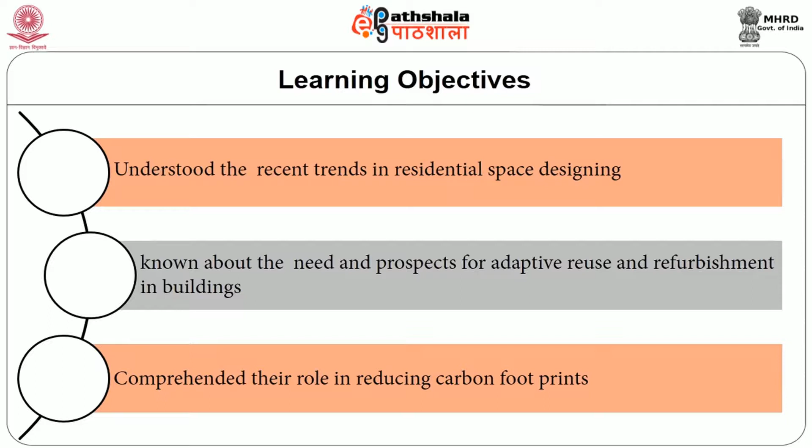Space is a unique element, and its planning, especially for residential purposes, is quite challenging in this dynamic world. Hence, specific objectives have been set such that by the end of the session, you would have understood the recent trends in residential space designing, known about the need and prospects for adaptive reuse and refurbishment in buildings, and comprehend their role in reducing carbon footprints.

First, let us understand why residential space designing is important. A perfect understanding of residential space planning is a felt requirement. The concept demonstrates the maxim 'more with less,' meaning optimum utilization of all available space in the most efficient and effective manner, complying with the user's special needs and requirements.

Space is one of the most valuable assets for human beings, as it reflects one's economic status with the passing of every day. It's a known fact that real estate booms are highly escalating. Hence, it is increasingly important to utilize every inch of space owned in the best and most practical way possible, yet not compromising on modern trends.

Research on improving methods of effective use of this element called space has been ongoing, as it has to comply with both the gratification of the demands of the residents as well as keeping abreast of the recent trends in the field of housing. Residential design enlists designing of the interior spaces of private residences.

This type of design is obviously very specific to individual situations. Therefore, the needs and wants of the individual resident are paramount in this sector of interior design. The interior designer may be entrusted with a job from the initial planning stage or may be on a contract to remodel an existing building.

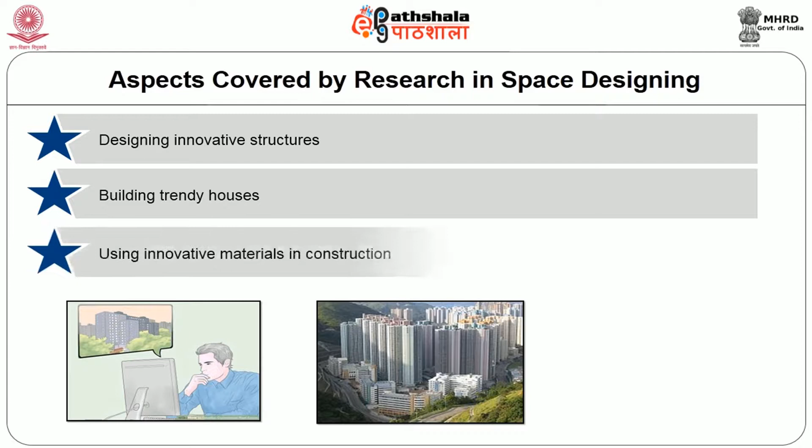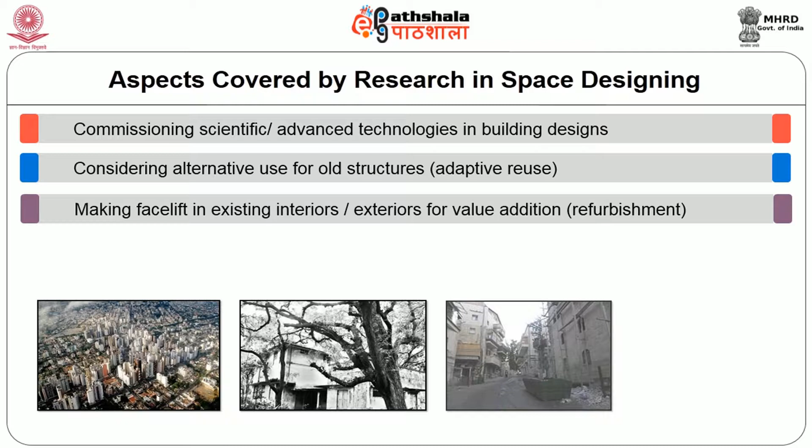Designing innovative structures, building trendy houses, using innovative materials in construction, commissioning scientific advanced technologies in building designs, considering alternate use for old structures - that is adaptive reuse, making facelift in existing interiors or exteriors for value addition - it's called refurbishment, and thinking through sustainable options to retain existing structures.

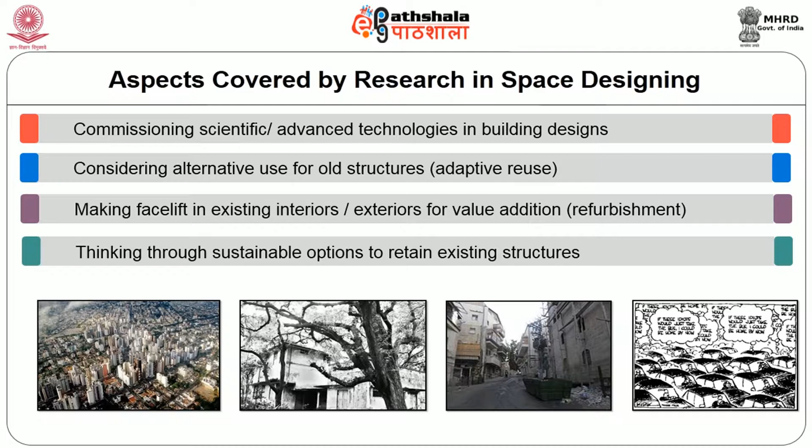All these research aspects warrant new trends and prospects to emerge in this field. What are the emerging trends and prospects seen across?

Trends, especially in residential space designing, happen due to the following major attributes: fluctuating outlook of consumers, the residents; deployment of new wave thoughts by architects, civil engineers, and interior designers; employing new genre prospects and materials in construction and decorating; sensitivity to environmental issues; awareness among consumers and supply side on interior design concepts, plus other influential factors.

They include current status of residents, that is, whether they are urban or rural, their occupation status, their education status, etc. Nature of the residents, whether they are convention bound or modern, nature loving, etc.

Liking for personalized interiors, individual needs and requirements, either for comfort, convenience, or luxury, sophistication versus casual comfort, showcasing of individuality and character in space and interior designing, liking for geometric forms and large outdoor spaces, inclusion of spaces of solitude, tranquility, privacy, etc.

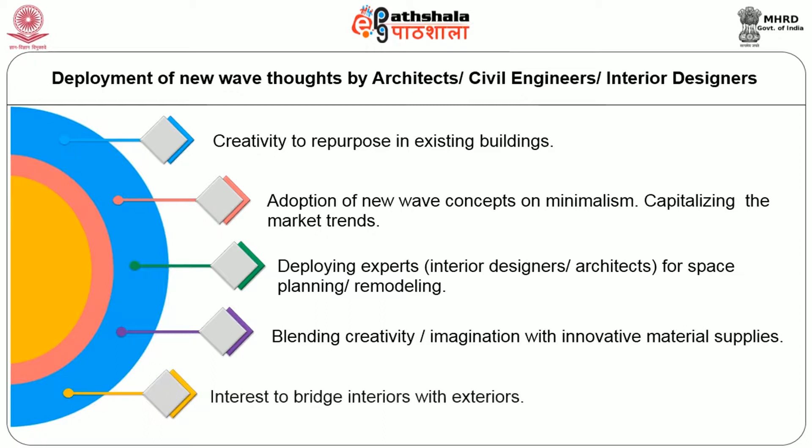They influence changes in the sector by including more than a dozen options like creativity to repurpose existing buildings, adoption of new wave concepts on minimalism, capitalizing the market trends, deploying experts, that is interior designers and architects, for space planning and remodeling, blending creativity and imagination with innovative material supplies, interest to bridge interiors with exteriors, and caution to ensure safety, security, and privacy in interiors.

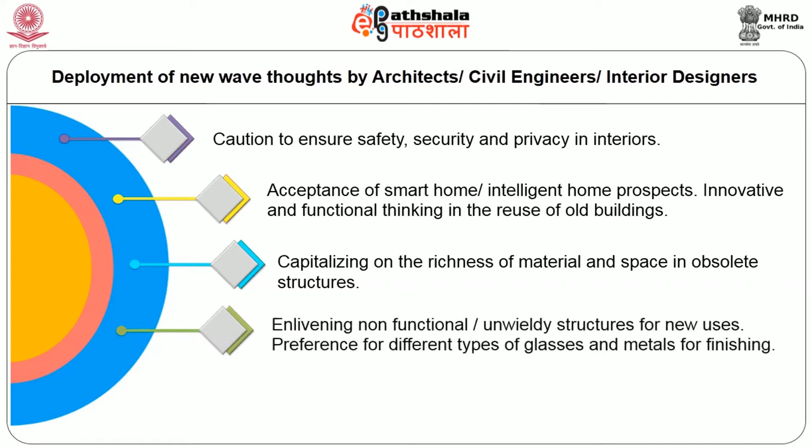Acceptance of smart home or intelligent home prospects, innovative and functional thinking in the reuse of old buildings, capitalizing on the richness of material and space in obsolete structures, enlivening non-functional, unwieldy structures for new uses, preference for different types of glasses and metals for finishing.

Reformed functions of room interiors. So personal experiences coupled with a platter of advanced technology, these groups emerge as new trendsetters in the field.

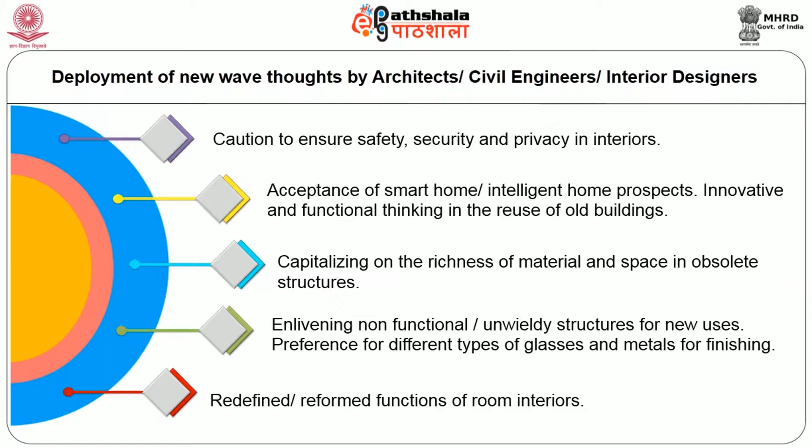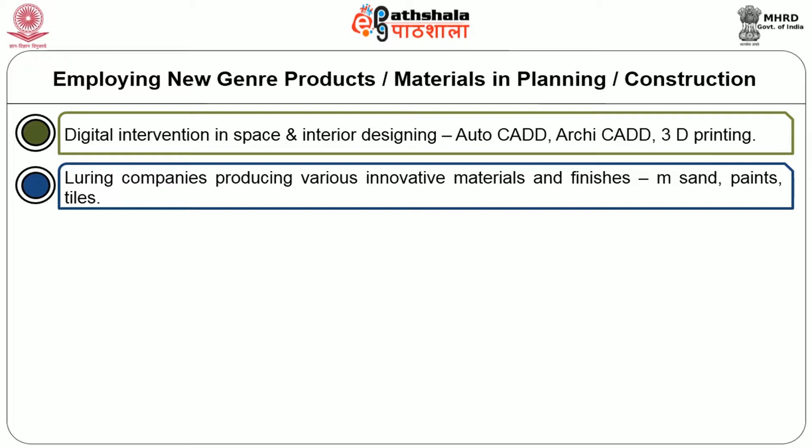Second one is luring companies producing various innovative materials and finishes like M-sand, paints, tiles, etc. Prospects for customization of products and designs, prospects for home, building automation and compactness in buildings, introduction of HMI and human sensitive and kinetic systems in buildings, advances in science and technology in house building sector, optimal use of modular units and prefabricated structures. These are remarkable advancements which have changed the building sector scenario itself.

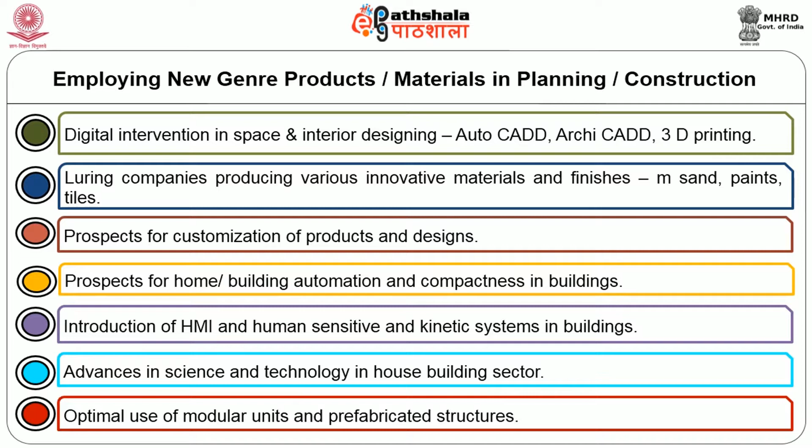I hope you will definitely agree with me. Then we will see the next influential aspect. That is sensitivity to environmental issues. People in general have become quite sensitized to environmental issues in recent years.

This change in outlook has had an impact on the selection and use of building materials too. The points listed in the slide are rather self-explanatory. Sensitivity to environmental degradation, knowledge on the impacts of the construction sector on the environment, readiness to adopt waste reduction,

sensitivity to use of eco-friendly materials and construction techniques, understanding the potentials, durability and benefits of indigenous materials like terracotta, bamboo, etc. Doubtless, these technologies have created vibrant ripples in the construction sector, especially of residential buildings.

Next one is awareness among consumers and supply side on interior design concepts. This is an important fact which has influenced both the demand sectors and suppliers alike and has caused welcome changes in their mindsets. So what changes do you see?

Unwillingness to compromise on quality and detail, awareness on functional and aesthetic designing of interiors, demand for application of good taste in designing, preference for eclectic styles, that is convention blended with modern, influence of media, introducing new recent trends, quest for introducing thematic interiors.

Apart from these facts discussed till now, there are three significant motivators which insist compulsory changes in the attitudes of both the groups. They are governmental and environmental regulations encouraging or curtailing demolition, and color trends of each year. It was bold blues for 2016 and it is dark greens for 2017. Do you know that fact?

All industrial activities have contributed considerably to environmental degradation, some harsh enough to push certain aspects to the point of no return. Population explosion is one such factor.

The construction sector contributes to national GDP to the extent of 8%. In recent years, it has proved to be the fastest-growing sector thanks to rising population and urbanization. The alarming fact is the enormous carbon footprint of the sector.

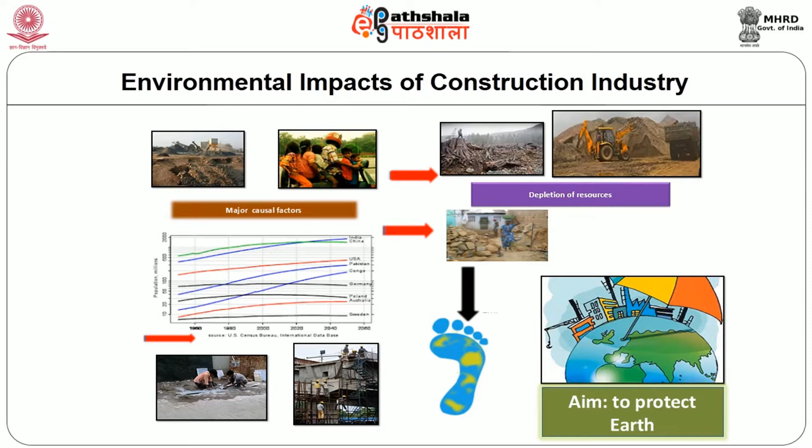Measures on a war footing to stop or at least reduce natural resource depletion, and turning back the clock to nullify effects of reckless actions, need emphasis. If not, the outcome may be catastrophic. Let us pledge and aim our efforts to protect Mother Earth.

How can the construction sector be responsible? Estimates project the presence of 100 million buildings in the country, out of which 90% are designated as residential and the rest for commercial use.

Out of the total energy consumed, more than 20% is used by these buildings. Continued use further not only depletes resources but also accumulates emission of carbon.

Impacts to the environment from this sector should be watched keenly, as India has been declared the fourth largest emitter of carbon in the world.

Greenhouse gas emissions from built environments arise primarily from consumption of fossil fuel based energy. Construction materials used in their turn also generate emissions. This is particularly true of insulation materials, refrigerants, and air coolants that we use daily.

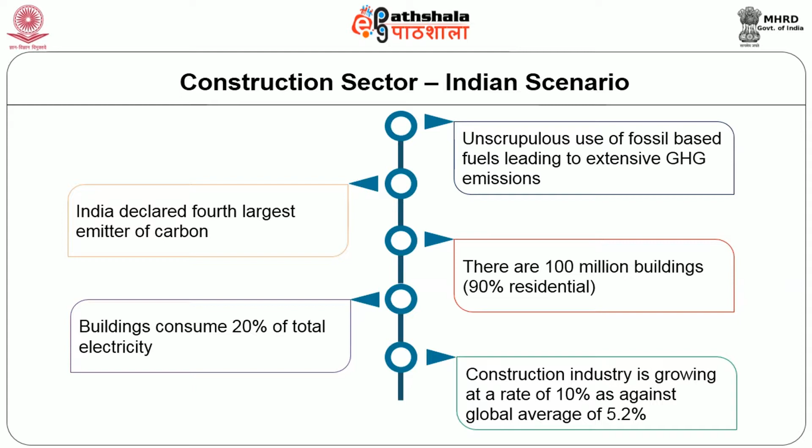Turning an eye to green buildings would be the right choice. Why? Use of various building materials and their impacts could be addressed from the primary stage of processing, manufacturing, logging, storing, through installation and use.

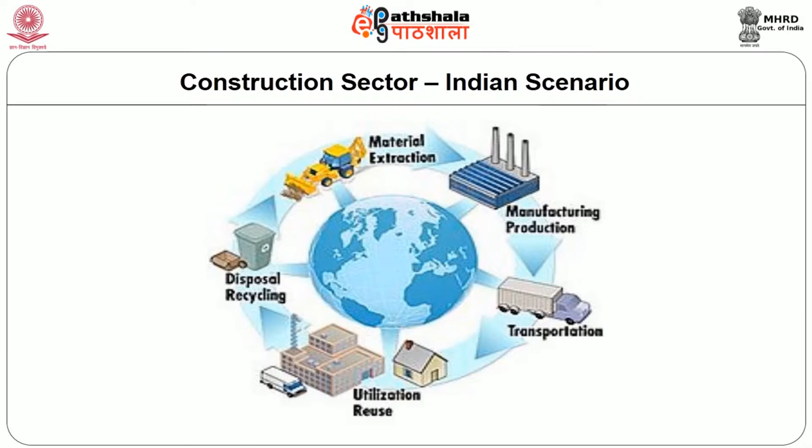During all these processes, large quantities of energy are used, which contribute to overall production of carbon dioxide, which culminates in the greenhouse effect. These stages are indicative of a building's life cycle.

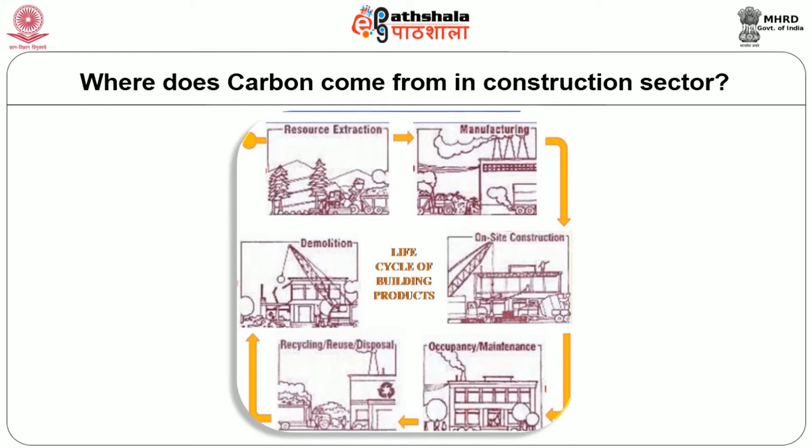These life cycle stages are characteristic of three phases, namely construction, maintenance, and end of life. Each phase uses a different kind of energy like embedded or embodied energy, grey energy, induced energy, and operational energy.

The last phase is inevitable for all buildings, especially recent ones, as they most often qualify as poor quality construction. But it can be changed by being cautious about the environment and trying to recycle or reuse them for good through strategic interventions.

This becomes all the more significant as buildings lose their utility or usefulness over a period of time. Interventions can be several, among which identifying buildings for their obsolescence, adaptive reuse, refurbishment, and adopting green building technology can gain significance.

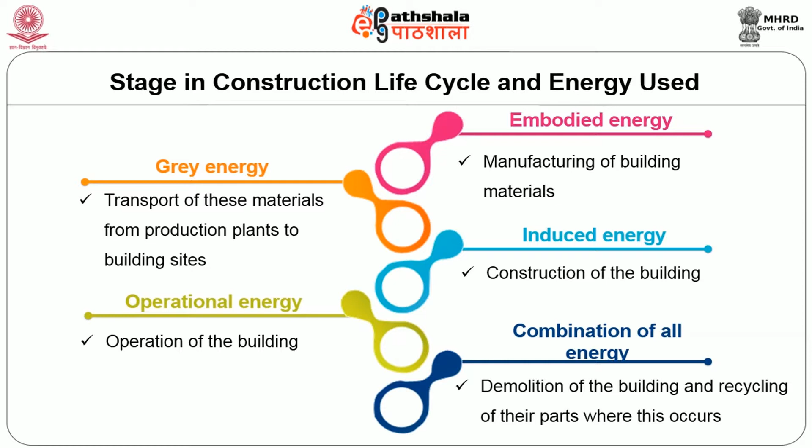What is obsolescence in housing or buildings?

Increase in vacancy rates, deferred or poor maintenance, and abandoning buildings are common features in urban living. A building's value and performance will decline with the corresponding aging and related damages to its structures and external fabric.

Despite that, its physical life can be stretched by careful maintenance and refurbishment efforts. Sometimes buildings may retain good condition, but the expectations people have for its functioning may be marred.

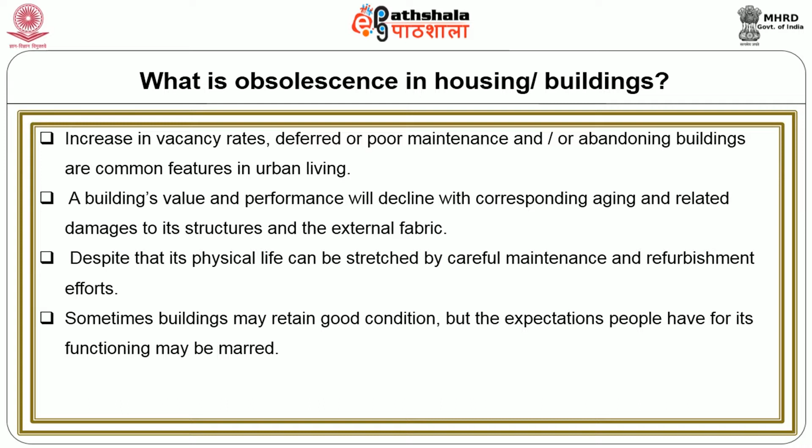Hence, both a building's physical life as well as service life have to be considered for satisfactory performance.

Once a building fails to provide services as expected by the user, it is called obsolete. They are stamped obsolete only when they become completely useless with respect to all possible uses it can be expected to support.

Hence, the decisive factors automatically enlist the trilogy of usefulness, desirability, and satisfaction.

Based on attributes considered to mark a building as obsolete, there are 10 categories. Existing buildings stamped as obsolete or rapidly approaching disuse, and those chosen for potential demolition, appear as raw material mines for future projects.

This is when one attempts to recover the hidden resources, a practice called resource recovery.

Another best opportunity lies in allowing the basic building framework to remain intact but thinking of a modified function. This approach is called adaptive reuse. It's like breathing new life into an existing structure.

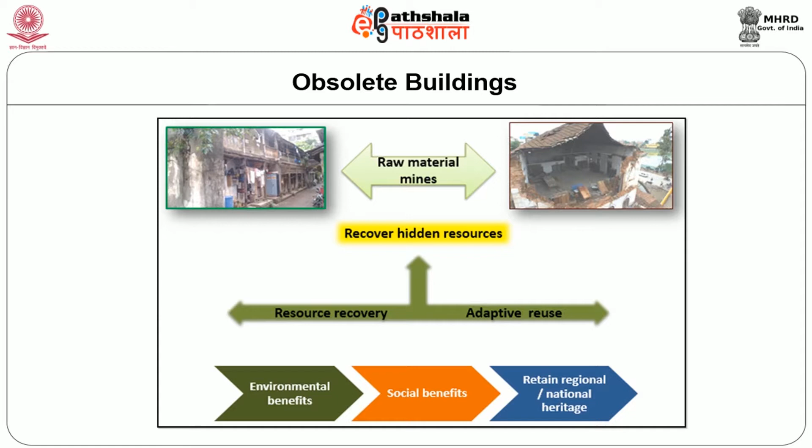This measure, if followed, carries with it not only environmental and social benefits but also a method to retain one's regional or national heritage.

What is adaptive reuse? Conventionally speaking, adaptive reuse is a process of adapting old buildings for renewed purposes. It suggests a phenomenon of protecting and preventing an old building from being knocked down, instead recycling and often retrofitting them with modern services catering to contemporary usage. So here the major portion of the structure along with the framework is retained in place while incorporating internal modifications.

It is the ultimate end game for empty, abandoned spaces in metros and cosmopolitan neighborhoods. It's a special form of refurbishment that poses interesting challenges for designers. It offers a potential opportunity to develop a solution that meets with financial needs of owners and the functional needs of the consumers through design that addresses the nuances unique to the consumers.

It is a sustainable choice in building use. It helps to conserve land, energy, and resources. It helps to preserve the heritage. These are the characteristics of adaptive reuse.

The Preservation Green Lab of the National Trust for Historic Preservation concludes that it can take between 10 to 80 years for a new energy-efficient building to overcome, through more efficient operations, the negative energy and climate change impacts caused in the construction process. According to them, it will take about 65 years for an energy efficient new building to save the amount of energy lost in demolishing an existing building. Hence, retrofitting and reusing buildings may offer environmental and monetary savings over demolishing structures and rebuilding them.

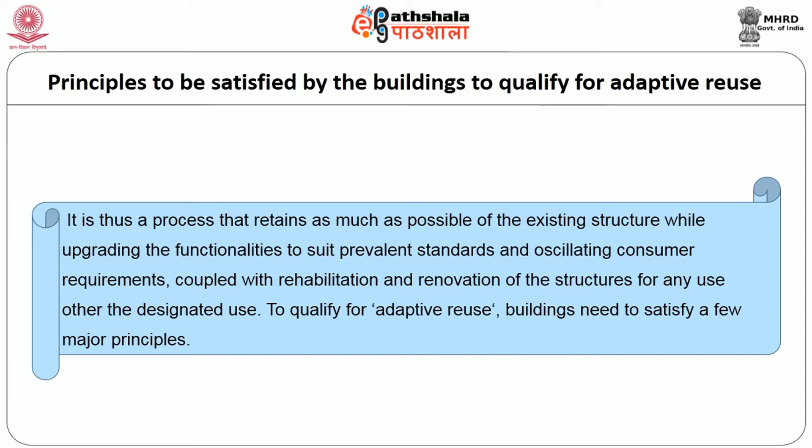It is thus a process that retains as much as possible of the existing structure while upgrading the functionalities to suit prevalent standards and oscillating consumer requirements, coupled with rehabilitation and renovation of the structures for any use other than the designated one. To qualify for adaptive reuse, buildings need to satisfy a few major principles.

They have to perform well the objective for which they are redesigned, that is, form should follow function, be durable and feasible for the redefined purpose, be responsive to the environment and try to enhance their value, be aesthetically captivating, promise minimal impacts on the environment, that is, being sustainable, non-polluting, energy efficient and easily accessible.

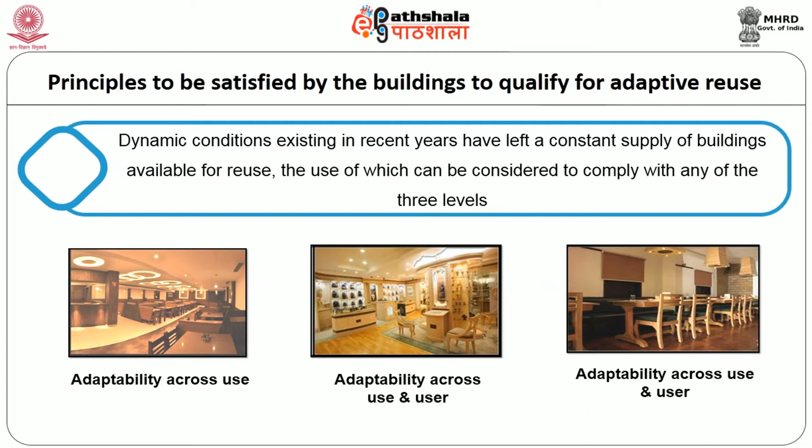Dynamic conditions existing in recent years have left a constant supply of buildings available for reuse, the use of which can be considered to comply with any of the 3 levels: adaptability within user, adaptability within use, and adaptability across use.

Choice of buildings for adaptive reuse can be preference for the locality, availability of the building at good price, available when needed, adequate parking space provision, the character of the building, spaciousness, vintage charm, standalone structure, etc.

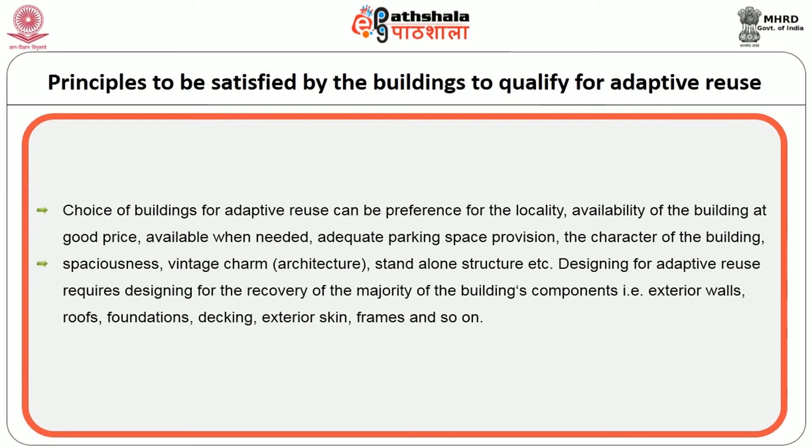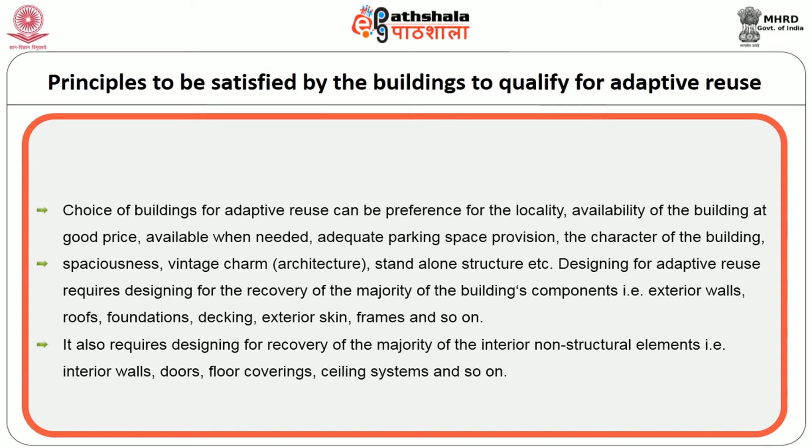Designing for adaptive reuse requires designing for the recovery of the majority of the building's components, that is, exterior walls, roofs, foundations, decking, exterior skin, frames, and so on. It also requires designing for recovery of the majority of the interior non-structural elements like interior walls, doors, floor coverings, ceiling systems, and so on.

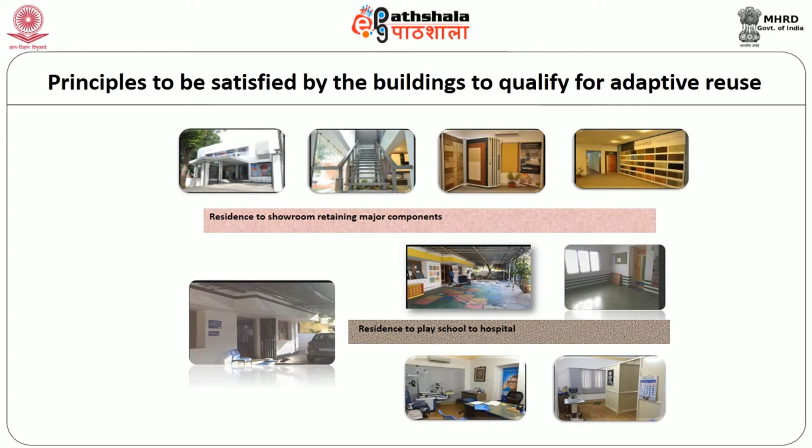Refurbishment. What does it mean? Adopting refurbishment for adaptive reuse is gaining momentum nowadays as commercial units and business centers are constantly on the lookout for spacious interiors. Those buildings which are functionally obsolete and those capitalizing on zoning and building laws, along with the boom in real estate sector, have made these realizable goals.

It entails giving outdated buildings a new purpose by upgrading or reconfiguring it beyond the cosmetic corrections. Refurbishment done can be a very minor or insignificant work, but the changes it can bring out as value addition counts to a great extent. By doing so, the lifespan of the building can be automatically increased.

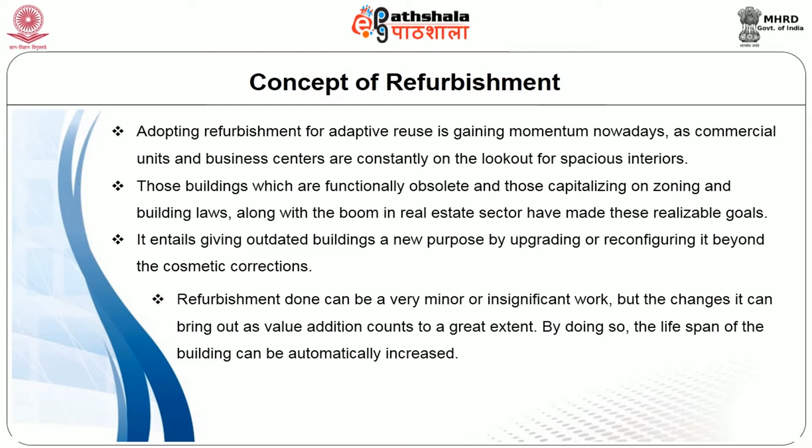How can opportunities for refurbishment be approached? By locating reasons, by finding preference for building sustainability, choice of level of refurbishment, identifying options for the 5 R's, and prospects for value addition.

Refurbishment and modernization can effectively extend a building's life expectancy by resetting the clock, and this phenomenon plays a major role in the reusing and recycling of existing buildings as opposed to demolishing, commonly referred to as adaptive reuse.

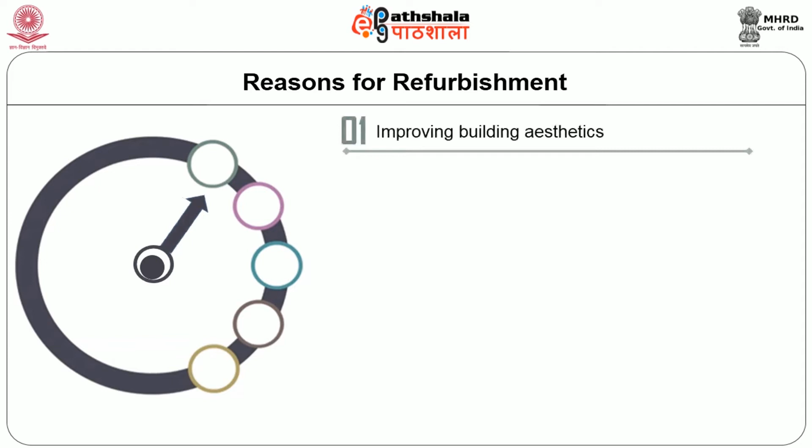Reasons for refurbishment can be anything from improving building aesthetics, increasing usable floor space, complying with changes in building regulations, changes in use, and obliging the needs to upgrade services.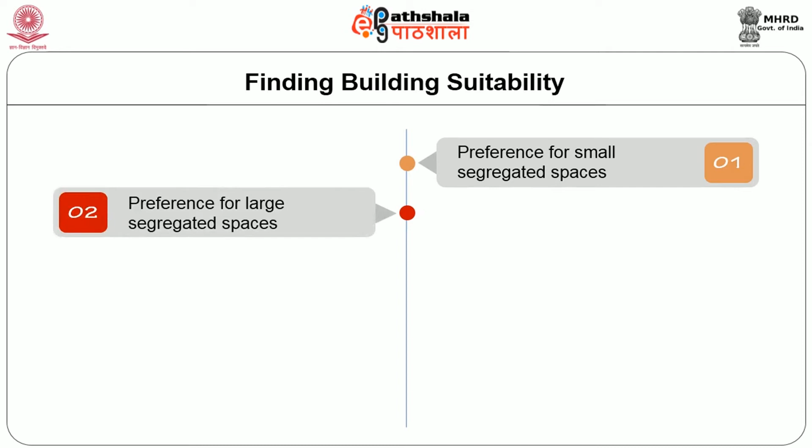Building suitability and main design specifications for which refurbishment is preferred can be delineated as preference for small segregated space around the building or large segregated spaces, attractive facade, open space around the building, or parking space allocation.

Similarly, level of refurbishment can be introduction of minor or cosmetic changes, services, structural modifications, or major alterations. Evidences for such refurbishment attempts you would have seen in the earlier slides.

Am I right? Have you understood the concepts?

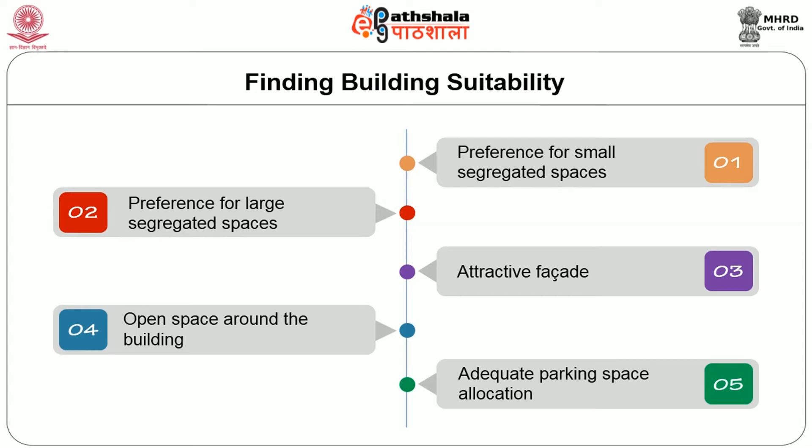Now let us see the other two major aspects which advocate in the positive for refurbishing old structures.

Refurbishment of sub-superstructures like foundation, walls, flooring, etc., and fenestrations, service components like plumbing, sanitary facilities, HVAC equipment, etc., and aesthetic components like facade, interior wall finishes, and landscaping.

For extension and conversion of room, creating a balcony or portico can be attempted by retaining the original, repairing or renewing them, replacing with a better alternative, removing them, or introducing new components.

In the purchase of a constructed facility, the buyer or owner values those components that are in place when the owner occupies the building. The activities necessary to place these components are hence value adding from the owner's perspective.

Inadequacy in the number of emergency exits, insufficient natural lighting, vastu reasons, inadequacy of potable water or natural ventilation and usable space, and inappropriate circulation routes, and anything like these can warrant refurbishment.

Incorporation of intelligent smart systems and assuring uninterrupted power supply also are unwritten rules of the day, which are visibly absent in old buildings. Requirements for an intelligent system include security, connectivity, the ability to adapt according to current data,

and the capacity for remote monitoring and management. Refurbishment options facilitate introduction of these value additions too. The slides will help you understand the benefits. Next is the concept of green buildings in terms of adaptive reuse.

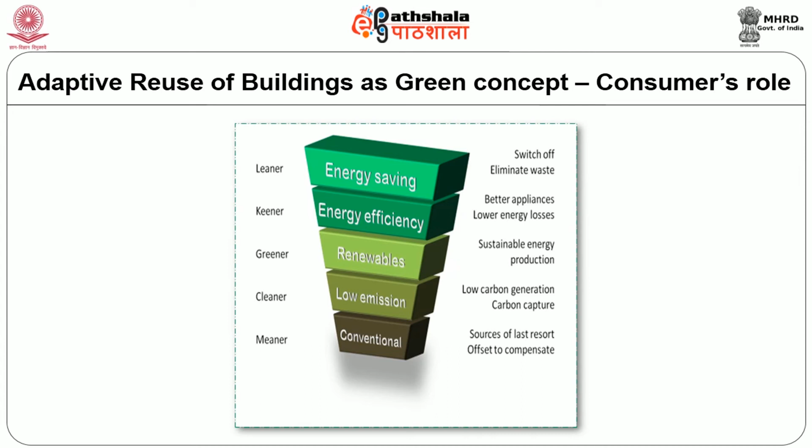What are the principles of sustainable design? Using materials that do not emit toxic particles, fumes, or gases.

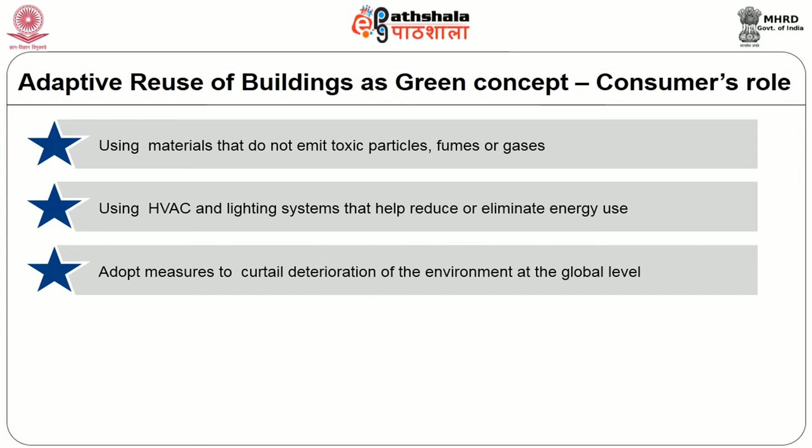Using HVAC and lighting systems that help reduce or eliminate energy use. Adopting measures to curtail deterioration of the environment at the global level. Relate the building plan designs to the regional stipulations to ensure a harmonious relationship.

Achieve an efficient blend of building form, mechanical systems, and construction technology. These are the five principles.

Focused attention to the reports of the National Trust for Historic Preservation gains significance, as they blame the construction sector for a considerable proportion of damage done to the environment, and also claim that it would take more than a century to rectify the damages caused.

According to them, retrofitting and reusing buildings may offer environmental and monetary savings over demolishing structures and rebuilding them.

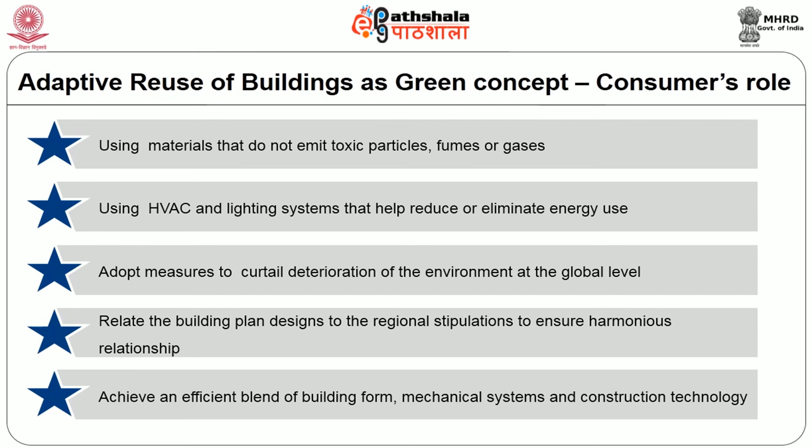Through adoption of adaptive reuse, many benefits can be included, like energy conservation, contribution to sustainability, time and cost savings in construction activity,

environmental benefits, potential tax advantages, increase in market value of the house, enhanced community character, encouragement for investment, and reduced carbon footprints.

With this, let me summarize. Through adoption of adaptive reuse, many benefits can be included, like energy conservation, contribution to sustainability, time and cost savings in construction activity, environmental benefits, potential tax advantages, increase in market value of the house, enhanced community character, encouragement for investment, and reduced carbon footprints.

With this, I conclude. Focused planning and a sincere effort to practice the nine R's, that is, restore, reduce, renew, recover, recycle, reuse, rethink, replenish, and replace, in this context is gaining popularity, and the resolution has roped in architects, interior designers in the wake.

Therefore, by practicing adaptive reuse and refurbishment, individuals can contribute as green consumers and join the nation in reducing energy consumption. Come on, let's join hands to create a new green consumer activist group. Let us make the place more comfortable to live. Thank you.